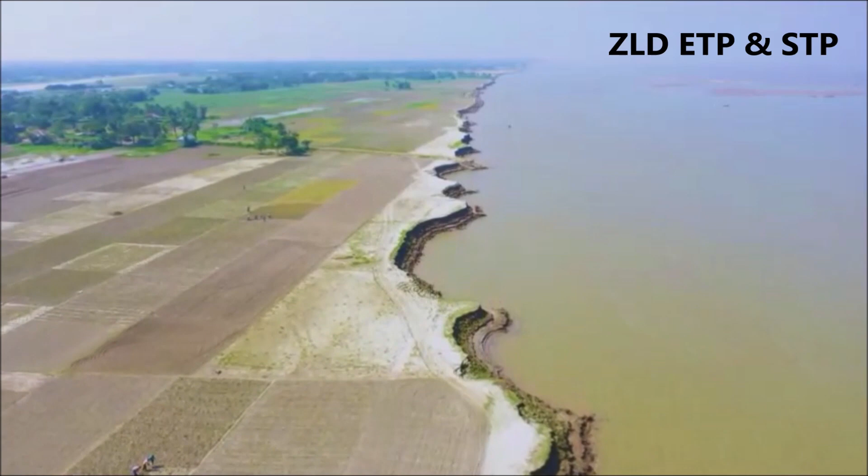Water is the source of life, therefore water is another name for life. But as a result of unplanned and excessive use, the world is going to face an extreme crisis of drinking water. It is said the next world war will be around water.

Although Bangladesh is rich in rivers, canals and reservoirs, it is not free from the crisis of drinkable water. With irrigation for crops, production and industries, daily use in offices and households, the groundwater level is gradually going down. Therefore, the environment is losing its balance.

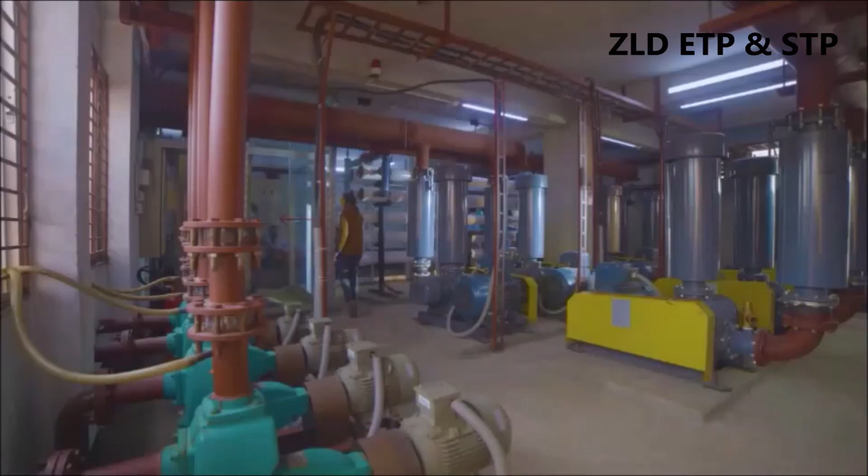In Bangladesh, various government and non-government initiatives have started environment-friendly projects for water conservation and planned use. One of these is to purify water used in households and industries and make it reusable. Green Genesis Engineering Ltd is doing this successfully with the world's most advanced membrane bioreactor MBR and reverse osmosis RO technology.

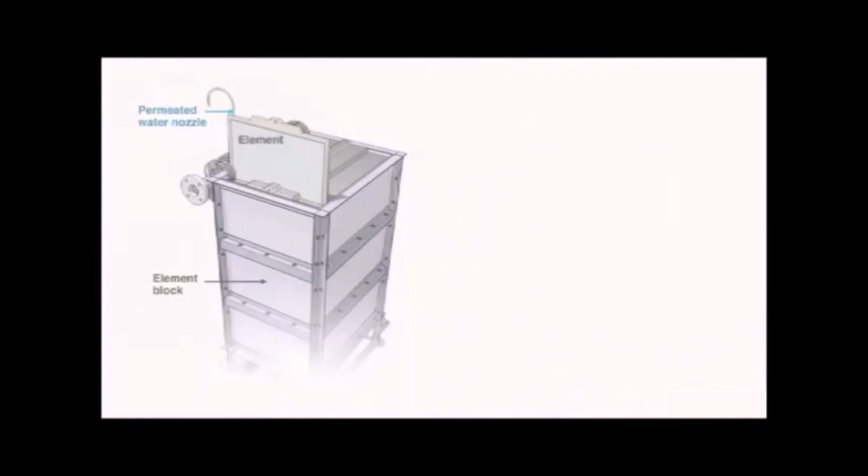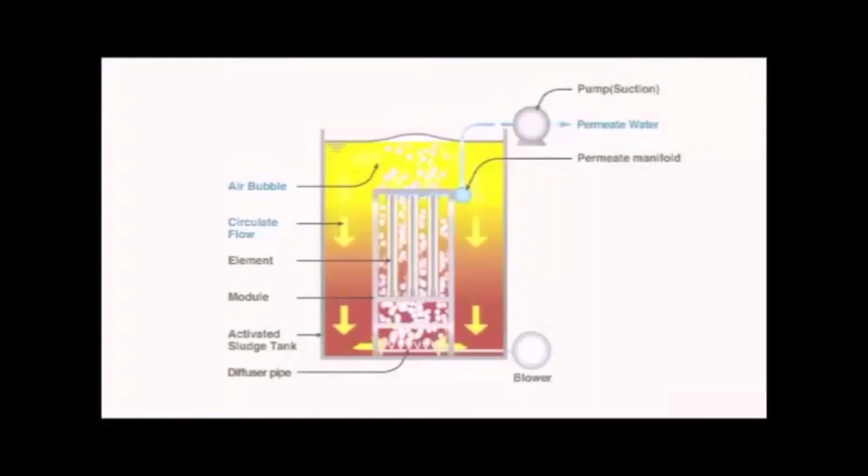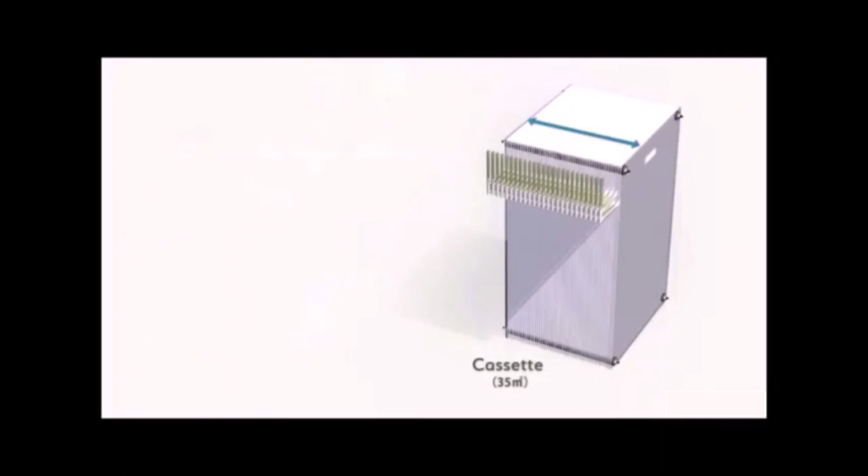Green Genesis Engineering Ltd is using world famous technology and equipment. Through this, about 90% of used water can be converted to become disinfected and made reusable. There is very little use of chemicals. This water purification method uses natural bacteria, therefore there is no harm to the environment and climate.

More than 80% of the city's water is used in multi-storied installations and buildings for sewerage and waste management. About 3,000 million liters of water is being used daily in Dhaka, the capital city of Bangladesh, extracted from more than 11,000 deep or shallow tube wells. The daily water consumption in industry is about 500 million liters.

As a result, the groundwater level in Dhaka is going down alarmingly every year, creating the risk of natural disasters, including earthquakes. It is possible to have groundwater extraction reduced by reusing water through membrane bioreactor MBR technology.

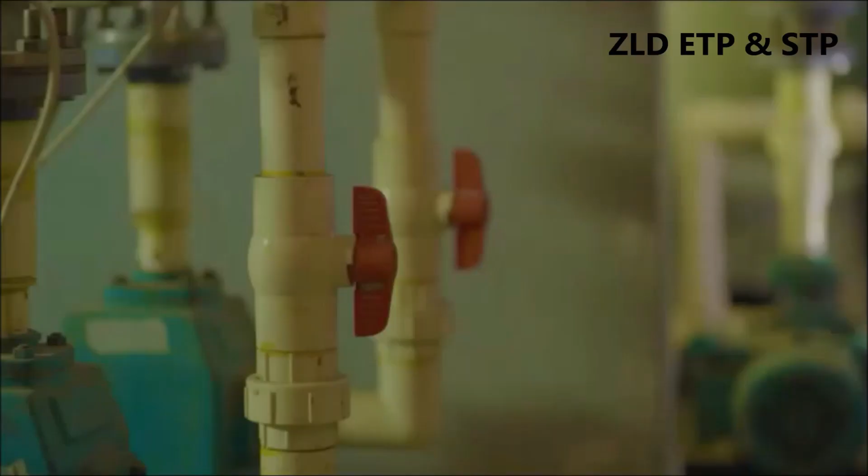Green Genesis Engineering Ltd is now implementing this water purification project of MBR technology, which is popular in the developed world. In this multi-storied building in Gulshan, the commercial heart of the capital Dhaka, used water is being treated and reused through an MBR plant set up by Green Genesis Engineering Ltd. As a result, the demand and waste of extracted water in the building has been reduced drastically.

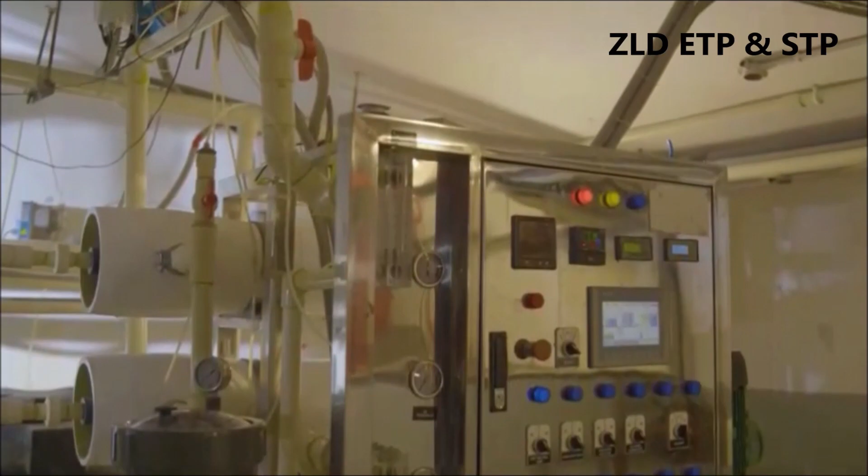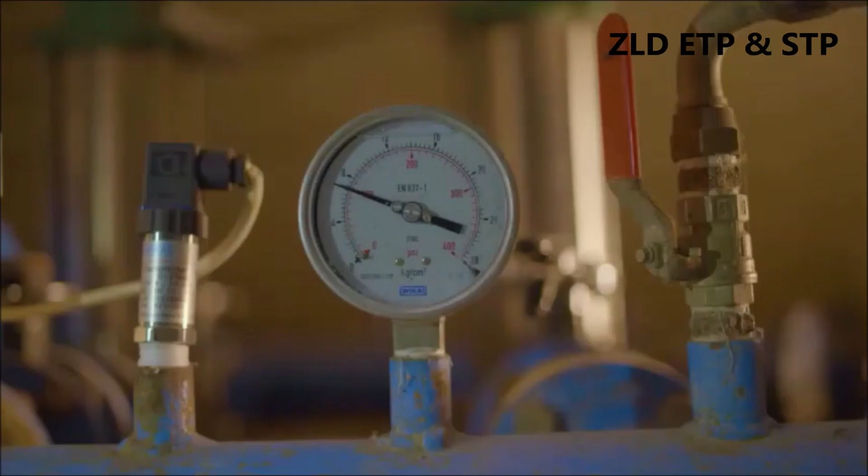The cost of water extraction and use has also decreased. Mobil Jamuna Bangladesh Limited has been recognized as an eco-friendly facility for this type of water management in multi-storied commercial buildings and received international certification in nature conservation.

This is Mobil House. We thought that we should make a green building so that it can save energy as well as protect the environment. So as a part of that, we have taken the initiative to make the wastewater usable in this building. The water we actually use should be recycled.

This wastewater management system actually helped us to achieve 85 points of the LEED certification from the USGBC USA, to make Mobil House the first LEED platinum commercial building in Bangladesh.

We are actually recycling and reusing most of our water in this building. So the bare minimum amount of water we are taking from underground and the water supply. We can say that with a minimum amount of investment, we are doing our social responsibility, as well as conserving groundwater, and also helping Bangladesh to be a little bit free from environmental impact.

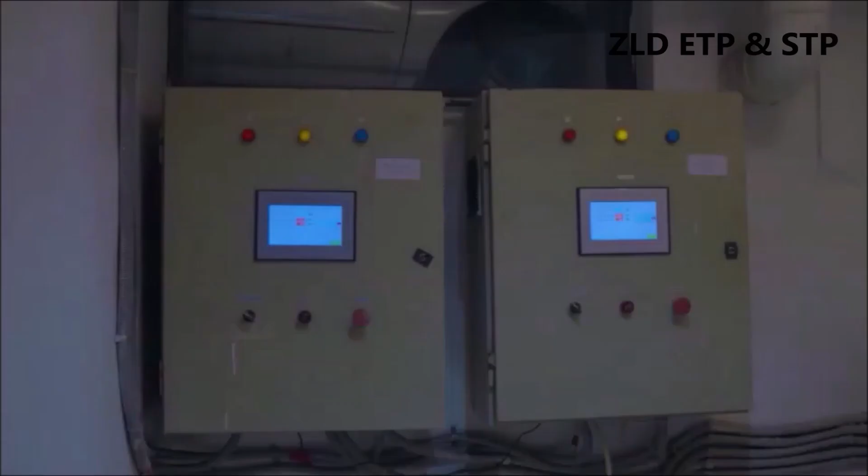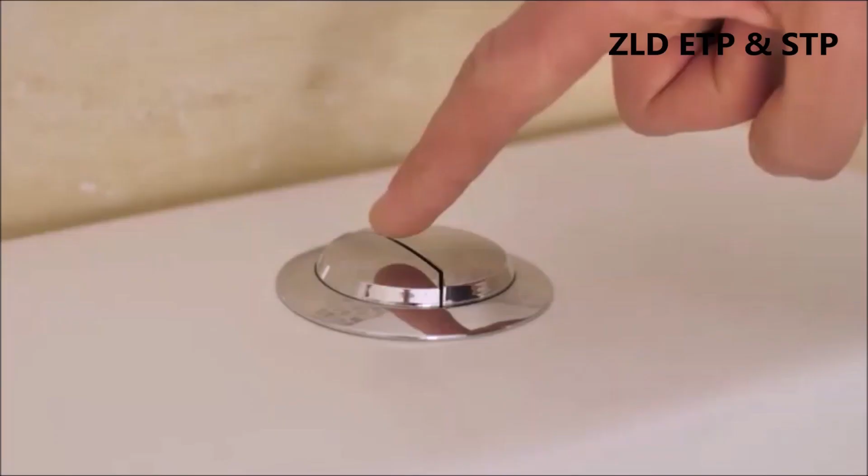They have utilized more than 90% of rainwater and meet all the required quantity of drinking water. They also recycle STP-treated water in toilet flush for reuse in the cooling tower. This plant is PLC and SCADA-based, a fully automatic operating system, so less manpower is required for operation. The plant has been operating for more than 2 years, and no sludge needs to be removed and no bad smell can be detected.

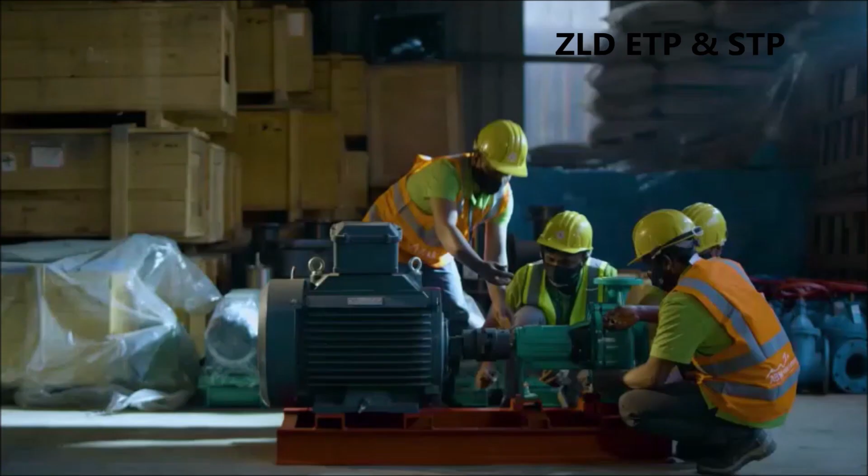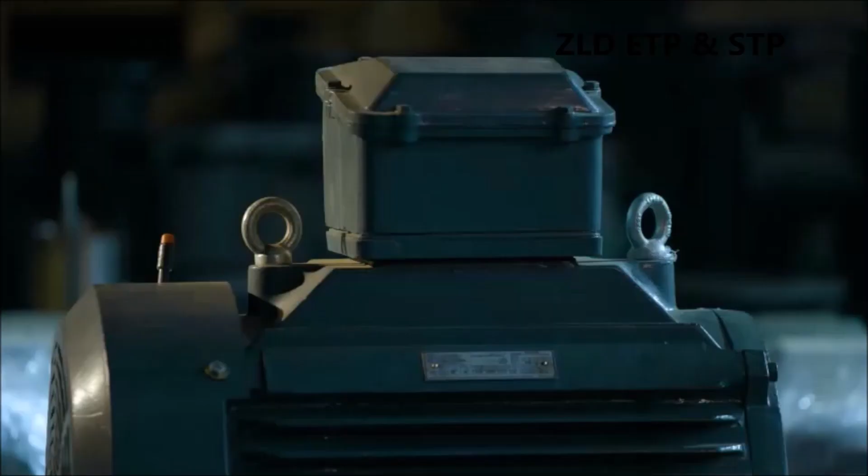Green Genesis Engineering Ltd has successfully implemented a number of exemplary projects in Bangladesh. This company has been the best in the country for almost 2 decades in water and waste treatment, and it has its own warehouse. 200 mechanical engineers and workers work round the clock, providing uninterrupted service in more than 70 plants across the country.

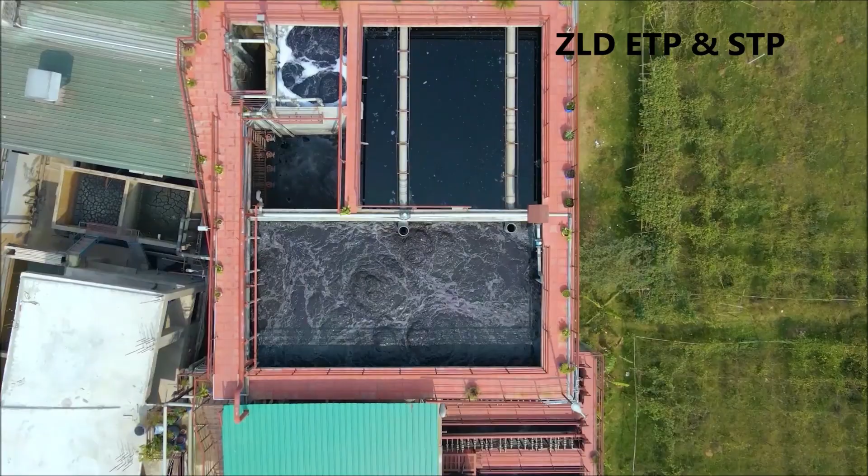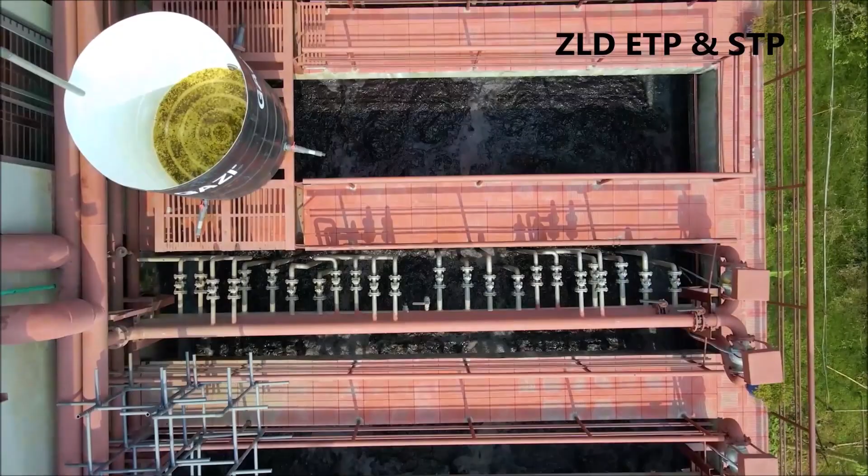Strict water management has now become a matter of urgency in the industrial areas surrounding the capital and major cities of Bangladesh. International and domestic environment protection organizations are also becoming increasingly strict. Water use policy is being prepared. In order to protect the environment and climate, reuse of water in industries may become mandatory very soon.

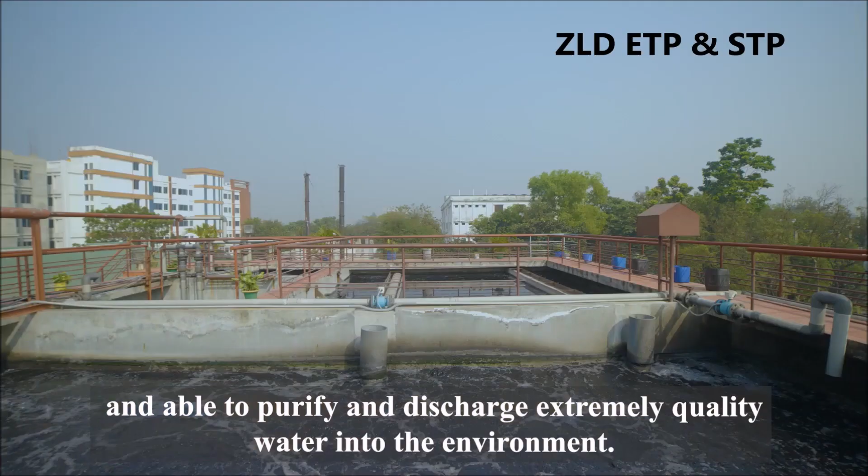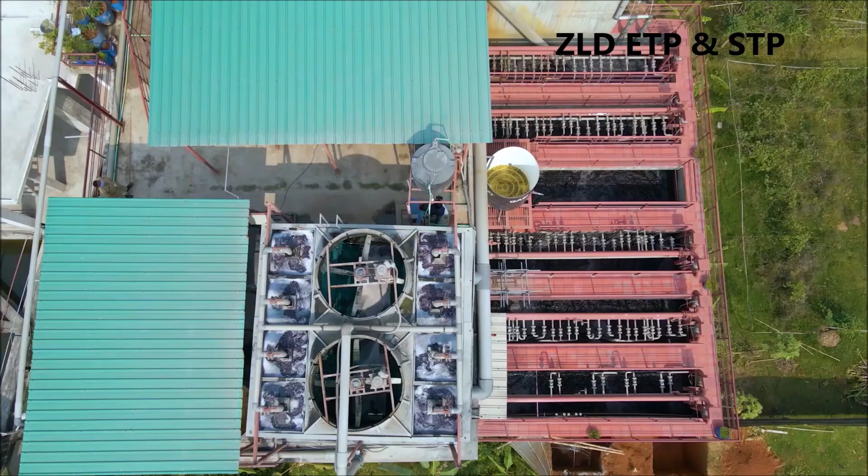With such possibilities in the future, Green Genesis Engineering Ltd has set up a membrane bioreactor MBR and reverse osmosis RO water treatment plant at Savar's Apparel Village. Every day, hundreds of thousands of liters of chemical and foul-smelling contaminated water get treated. This purified water is also going to be used for drinking purposes.

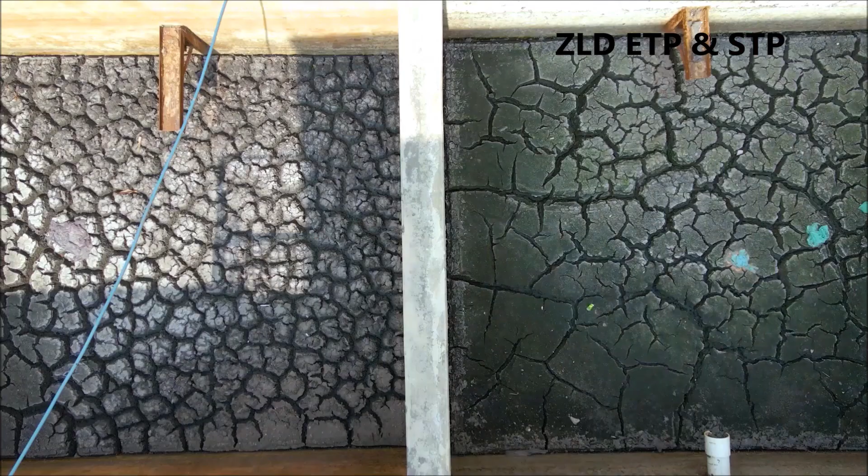Thanks to this world-class water and waste treatment plant, the factory has become green. The workers are developing physically and mentally by working in the midst of the wondrous natural beauty. The 100% export-oriented factory has become an eco-friendly industry.